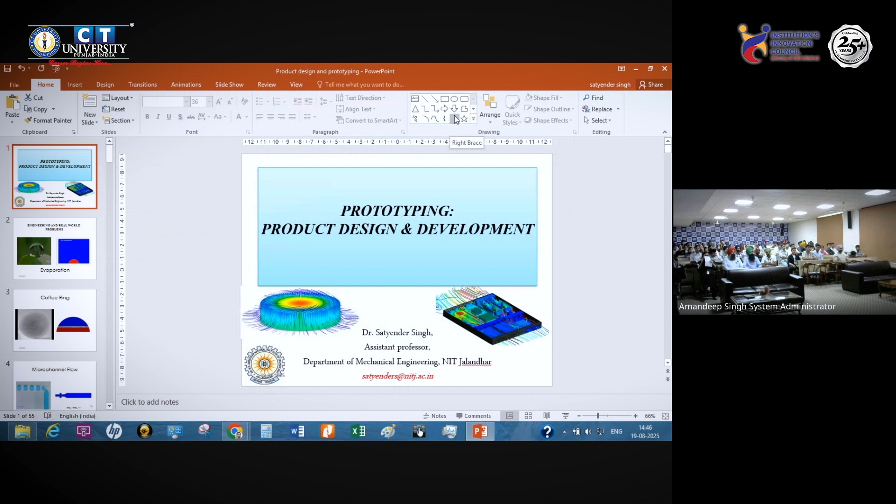Okay, my name is Dr. Satyender. I'm working as an assistant professor in the Department of Mechanical Engineering, and besides this, I'm also Associate Dean, Research and Consultancy. So we are also at NIT Jalandhar emphasizing this prototyping concept, which is a buzzword nowadays, as well as product design and development.

From the first year, we introduced some courses which are very relevant to this. The idea behind this is that we want to promote more student startups and faculty startups at our institute, and as per the idea of the government, we want to promote these activities now in academic institutes. So I will also discuss what steps we have taken, and this may help you set up similar things at your institute.

I hope my audience is, I think, the first year students. My presentation will follow like this: I will be discussing the capabilities of the software at present, or the tools we have based on mathematical things, and how closely we can relate experimental things with theoretical things, and without much expenditure on experimentation, how we can optimize the systems.

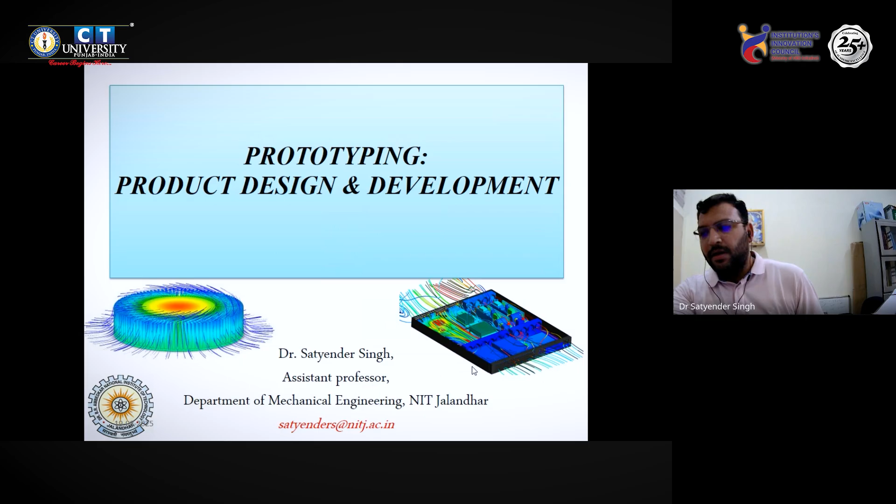So this is just an intro with this particular word, prototyping. So first, what I'm going to show you, my slides will go with some glimpses of the mathematical tools we have that reveal your engineering or real world problems. So real world problems can be like this problem of evaporation.

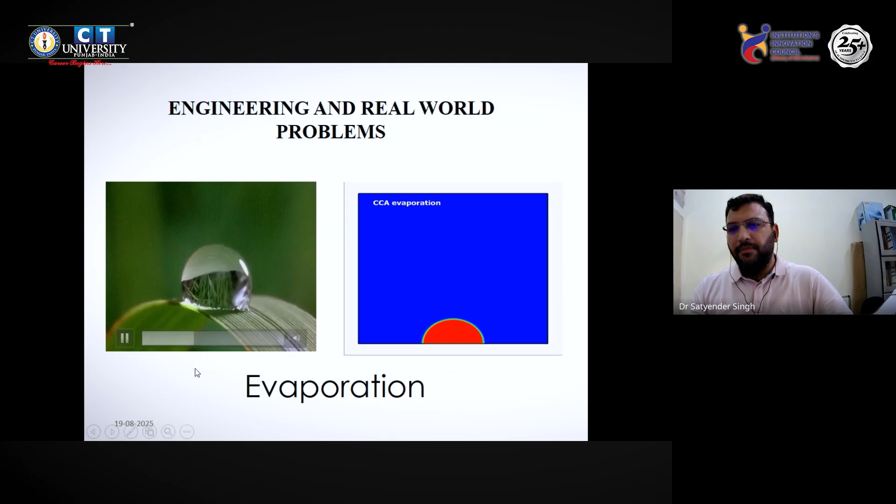See, you can consider a droplet resting on a leaf, and as evaporation takes place, slowly this droplet will escape. To capture this video, as all of you, the faculty members, are well aware, we need a high speed camera, and this physics later on can be implemented in some engineering problems.

But before jumping to the application viewpoint, we need to reveal the physics. So to reveal this physics in this particular experimental problem, we need a very costly high speed camera that may cost about 10 to 20 lakhs, and we have to capture every fraction of the second. So these high speed cameras offer facilities like 2000, 4000 frames per second. Only then can this very slow evaporation process be captured.

So I hope now you can relate this with the real way of capturing this droplet escaping as a problem. It may take a day, it may take 2 or 3 hours. Now, on the engineering softwares or mathematical tools, we have the same kind of mimicking. We can do that. It offers the same kind of facilities to mimic that.

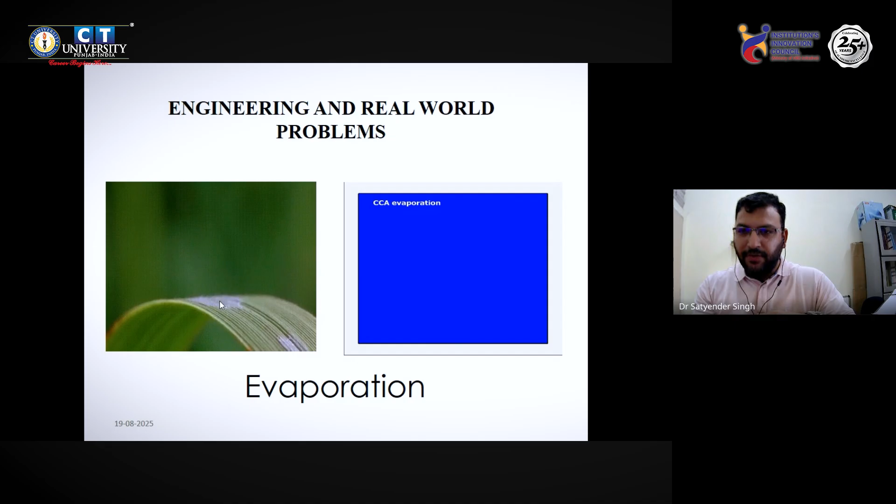Now the point is, what comes out of it. If I talk about the physics, particularly about this evaporation, there will be radiation that is responsible for raising the temperature of the leaf, and then the surrounding air that has less moisture, and then these droplets, the agitation will start on the bottom of the leaf surface. Molecules will start exciting, density changes will occur, then the molecule will escape. So these things will come, but these softwares will help you understand how these things are happening.

You can now write an engineering problem using these advanced mathematical tools, as well as reveal the physics. That will help you to write your problems later on.

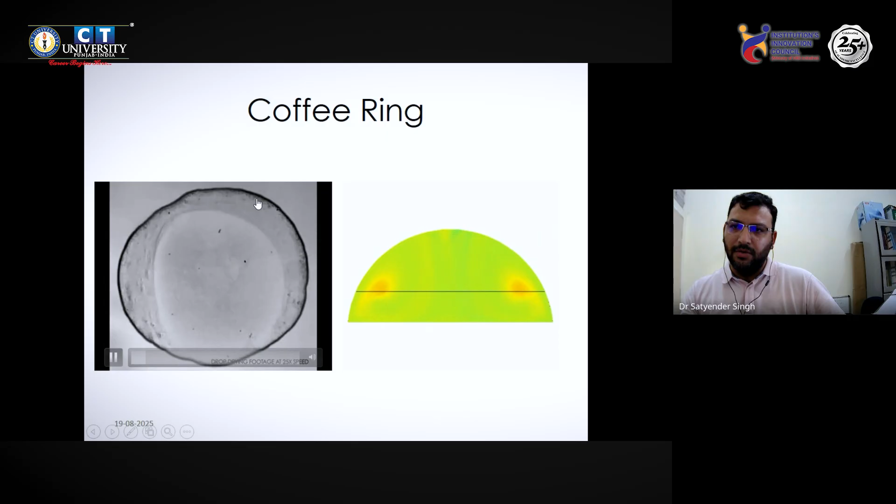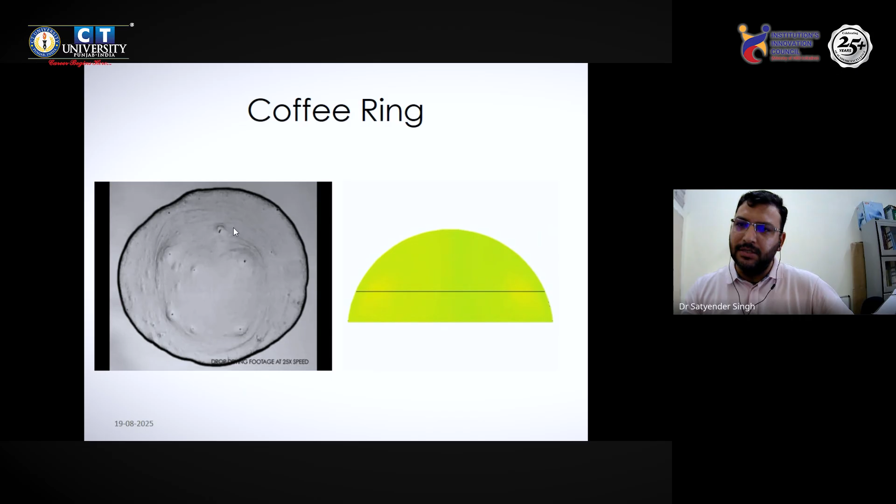So I am now relating this all with the coffee ring problem. If you spill some coffee, after some time we see these things happen. The responsible thing is the heat of the surface that excites the molecules, causing a density difference and raising them apart, which helps roll the individual molecules of the coffee, binding with some dust particles to make a layer, following the temperature gradient.

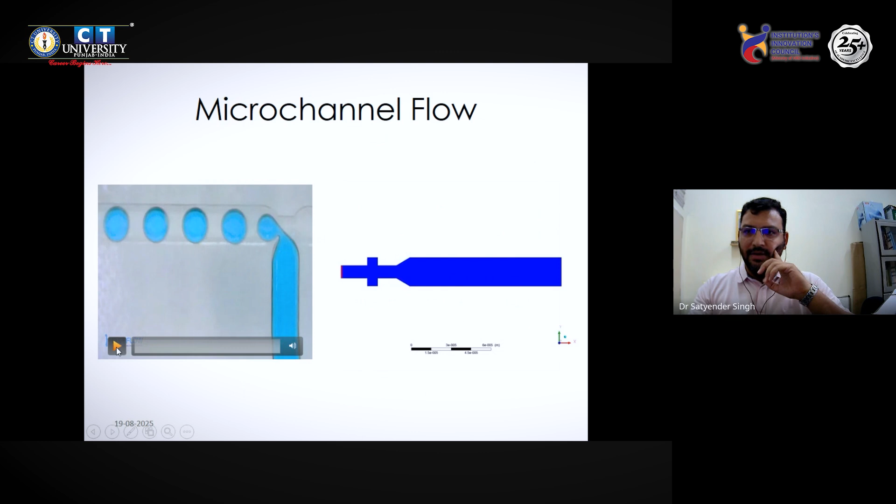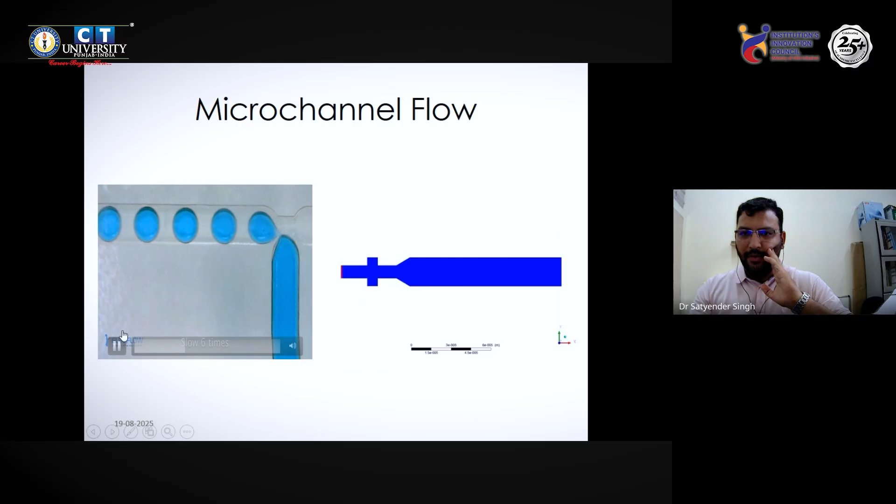By applying this physics and optimizing these microchannels, we are able to achieve this design and later develop it. But how can we do that without any expenditure? Through some CFD tools, through some software, which also facilitates creating the same kind of environment and getting the solution for the same.

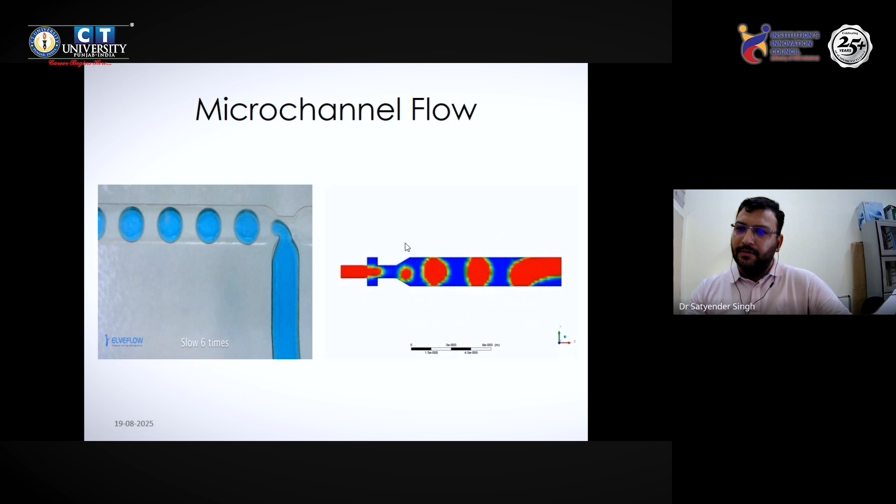So another example, say one droplet falling in a water pool, one of the standard multi-phase problems. We can mimic this also in software. Why am I showing you these videos? My point is to establish the software's capabilities to assist engineering in achieving prototyping, or product design and development.

This journey of an idea to a design actually first takes time and an overall understanding of the problem, and then it takes a whole journey of skills to make a product that can meet industry standards or meet the demand of society.

Earlier when we didn't have these softwares, and their capability was not up to that mark, we kept doing experiments, and from experiments, from failures, we had our learning, and then we later made a product.

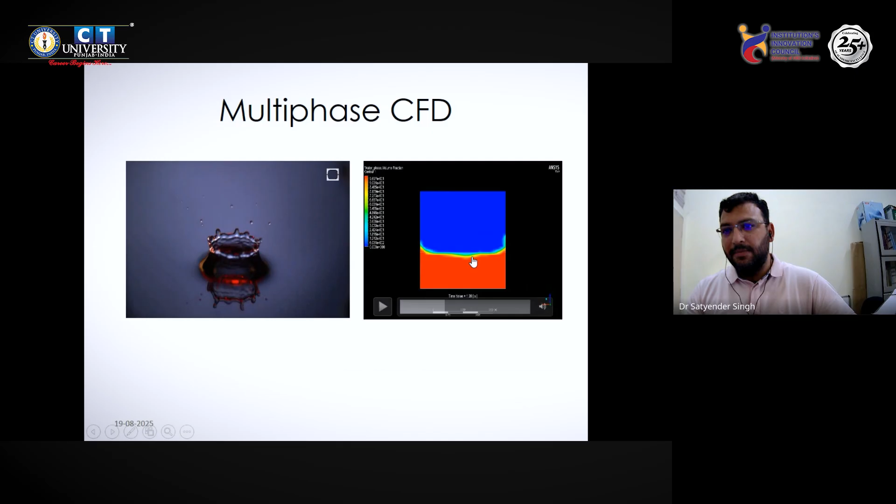But nowadays, these are the capabilities of software. Whatever is actually happening in real-life engineering problems, we are able to assist them, reveal the physics of that, and then we can optimize them.

If students are from the first year, optimization means, say, if you want to make a jet engine, or an aeroplane, or a fighter jet, whatever speed you want to achieve has to first be analyzed. Various shapes have to be given, so mathematical analysis has to be done, then only are you able to get some geometries or shape of that aeroplane or fighter jet, and only then will you manufacture it.

So what should be the dimensions - that is optimization, the value of your parameters that you have to set.

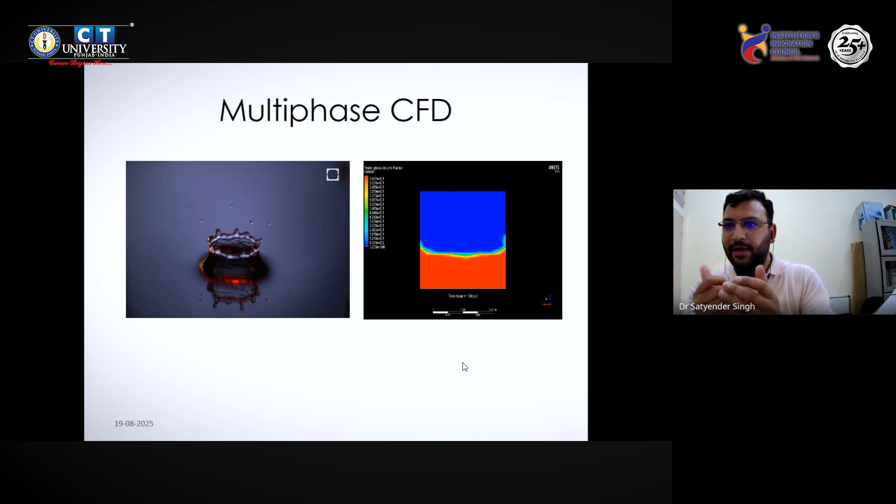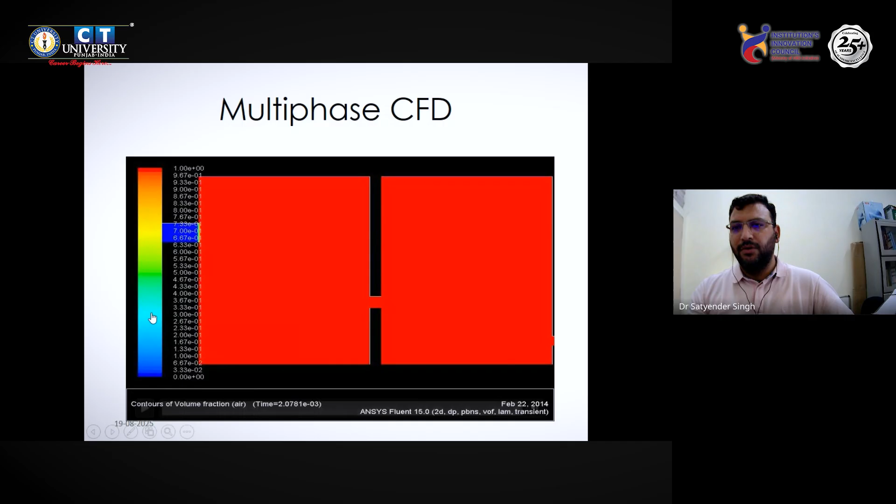Now another problem, say a dam filling problem. If you have to construct a dam, then how much time will it take to fill, when water will splash at a particular height, what will be the erosion rate, drag, and other things - we can investigate like that.

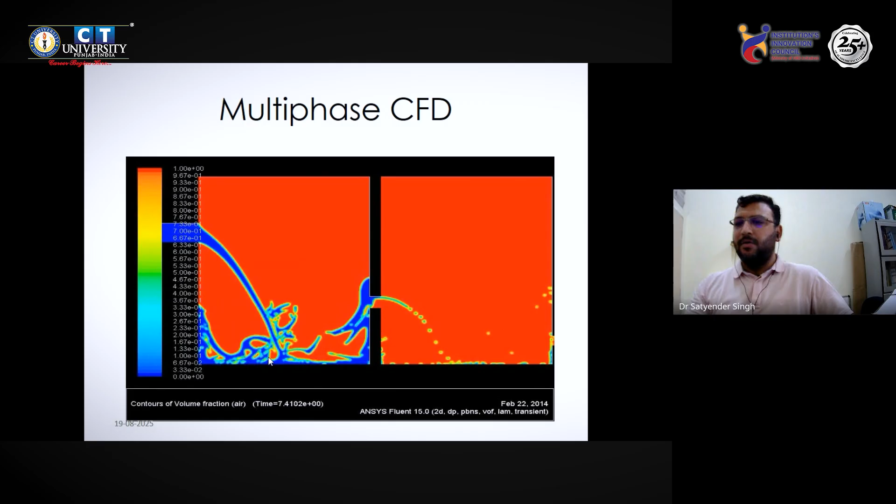Without doing any experiment, in a sophisticated mathematical environment, we can handle all these problems. If there is a dam structure, how much penetration can occur below the dam in the soil region - this problem also can be solved. So these things are very important from the structural viewpoint.

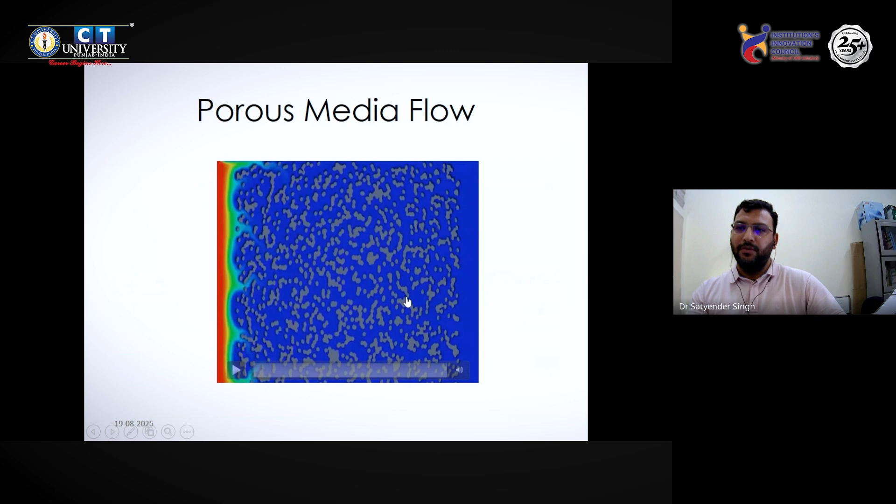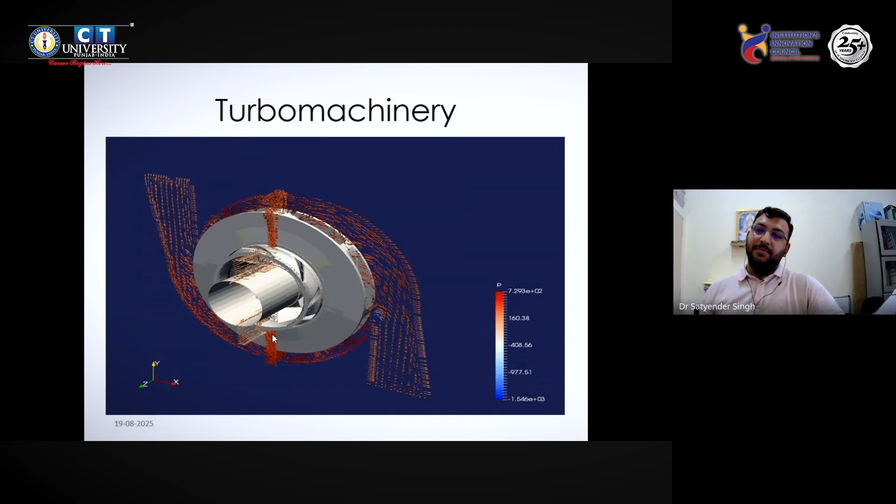For turbo machinery, what should be the fan angle so that we can get maximum flow rate? A CAD drawing followed by some numerical approach of mathematical numerical methods, and we are able to simulate them to a particular objective. All these were prototypes earlier, then came to a particular design, and later on to a product.

So you will all be fascinated, if you are a mechanical engineer, toward cars and automobiles. I'm just showing you one video to grasp how we aerodynamically balance these vehicles.

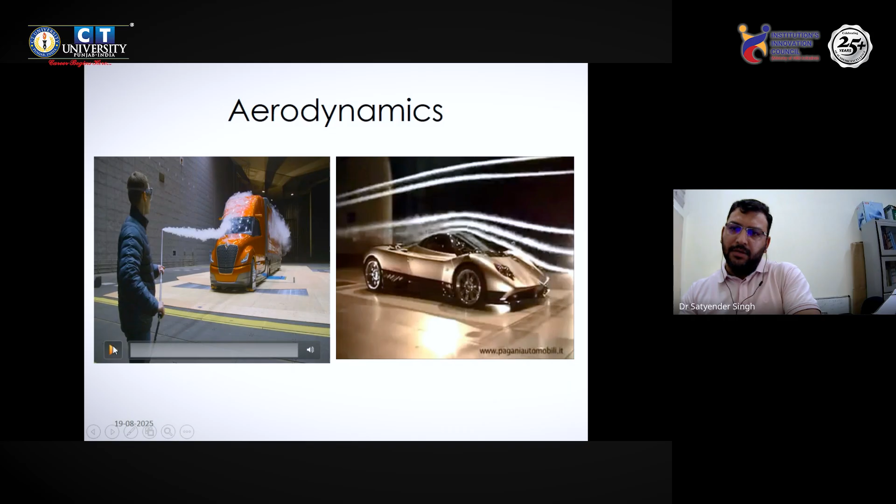So we have a particular wind tunnel, a big room where we have facilities to artificially create airflows with the help of blowers or fans, relative to the vehicle speed that can be attained at a particular speed. So we force the flow against the stationary vehicle, because it's the same scenario whether the vehicle is moving at high speed or the flow is moving over the vehicle, because relative velocity will be there. So in wind tunnels, vehicles will be stationary and the smoke will be flowing over the vehicles. This is how simulations are carried out.

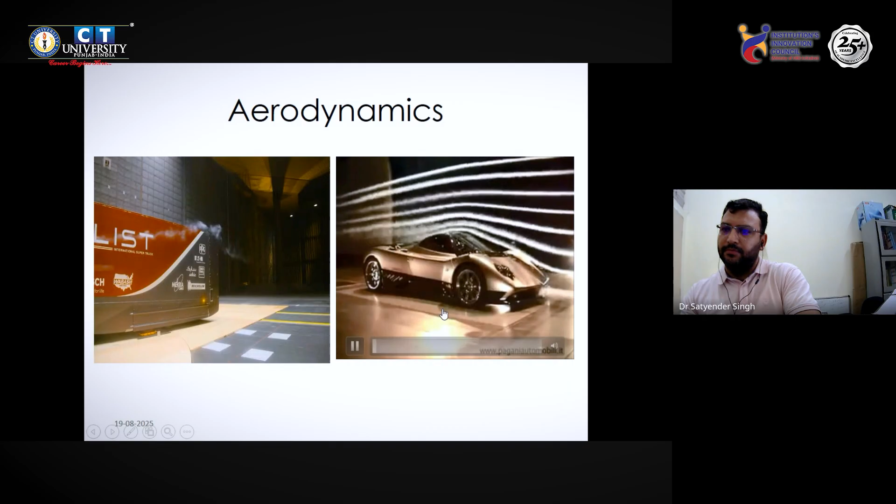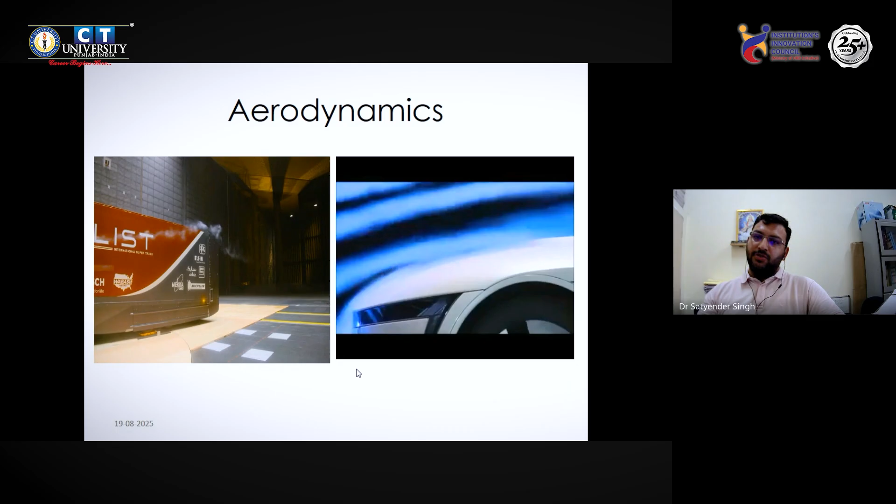So why are these studies important? So that your vehicle can be aerodynamically balanced at a particular high speed, at a particular turn, to avoid accidents, because the air will cause drag on the vehicle. It also reduces the power of the vehicle. So this is just to study that.

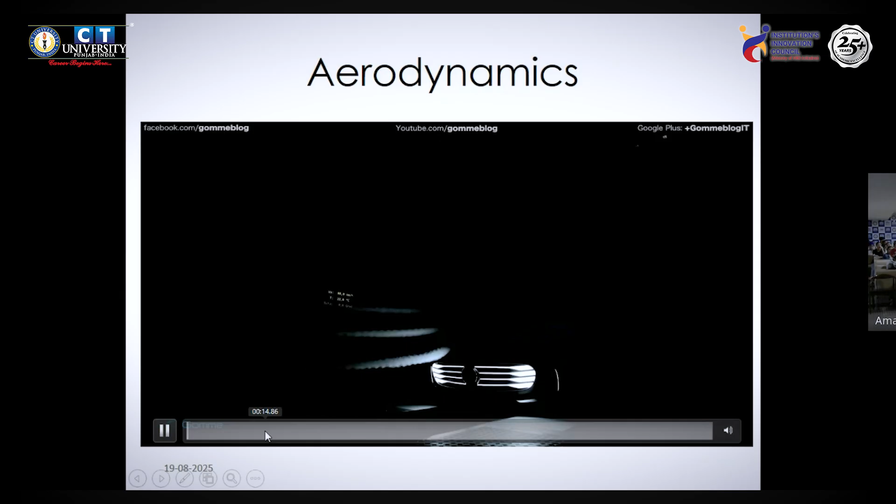This is about Mercedes. They also have some kind of facilities at their end. Dr. Singh, hello, yes. Any student, if somebody wants to ask a question, please. The professor is here. If anybody wants to ask any kind of question in between the slides, please tell.

It's a very interesting session. Any session is interesting when there is a two-way channel, meaning if only sir keeps speaking and you keep listening, you get bored. If you are observing and you have some question in your mind, please kindly ask.

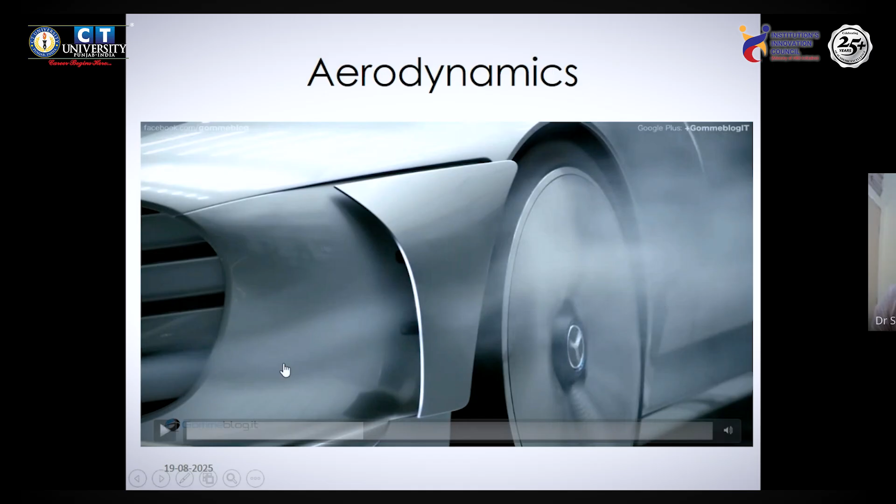So I'm showing you another video where the aerodynamics of a vehicle is checked by Mercedes.

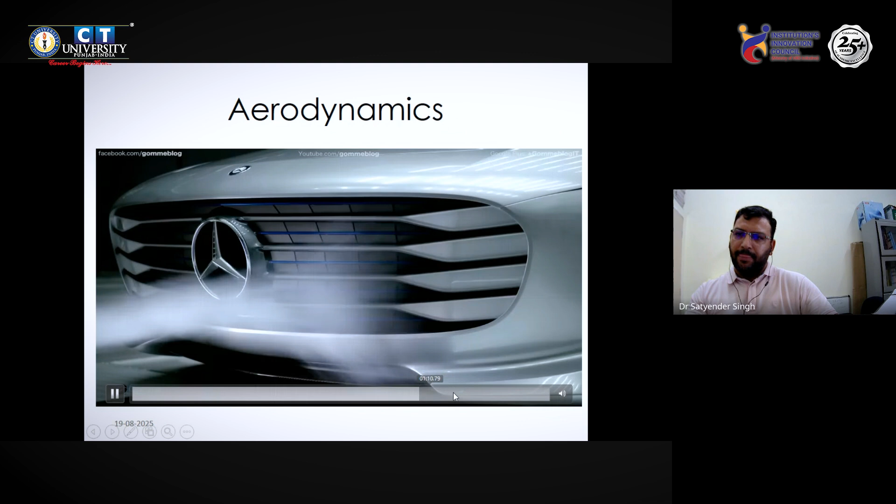The idea is to understand the aerodynamics of the vehicle so that the drag, if there is any, can be addressed, because in the automobile sector there is huge competition in the market. There are so many models, and if a particular company has to sustain in the market, they have to continuously change their design. Every change in design also affects the technical satisfaction of the physics responsible there, meaning for every vehicle design there will be changes in the aerodynamics. So I'm showing you some actual pictures and the simulations we did.

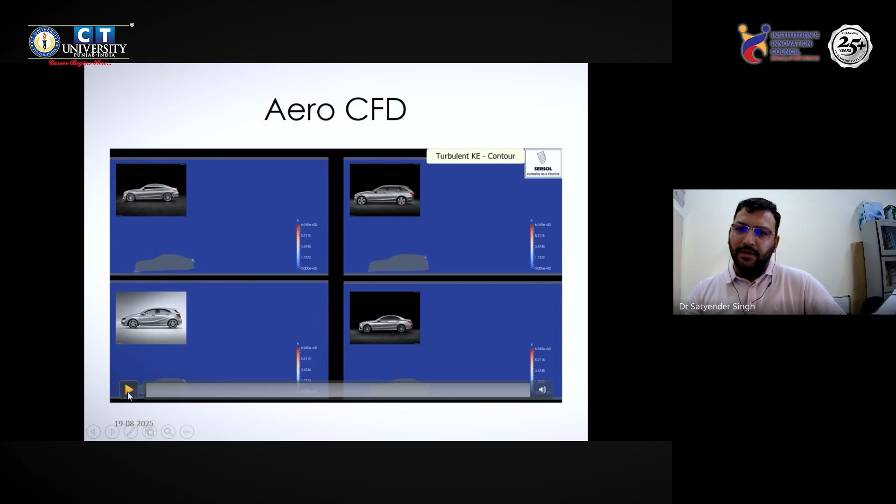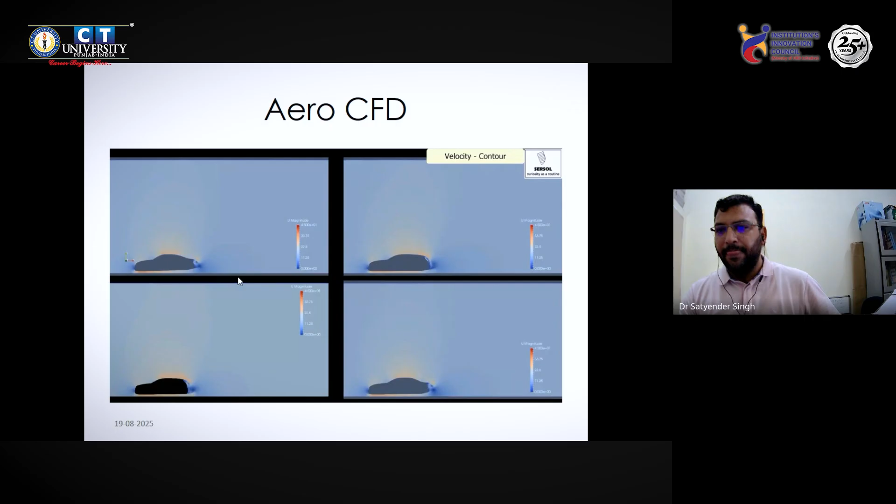Without doing any experiment, because wind tunnels are not easy to construct everywhere and require huge investment, we can avoid that using dedicated mechanical engineering softwares. Without any wind tunnel like these companies have, we can simulate all this in a computational environment under similar conditions.

Again, my message is that if you want to start your journey from a student to a startup engineer, or achieve some engineering expertise during your studies, you must know what softwares are available in the market, and up to what extent you can have a proper design without spending money on experiments, and then develop and manufacture that.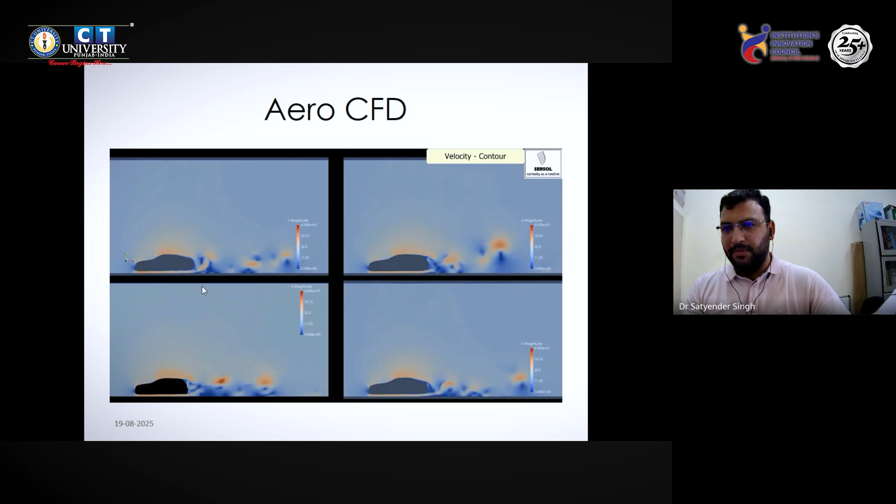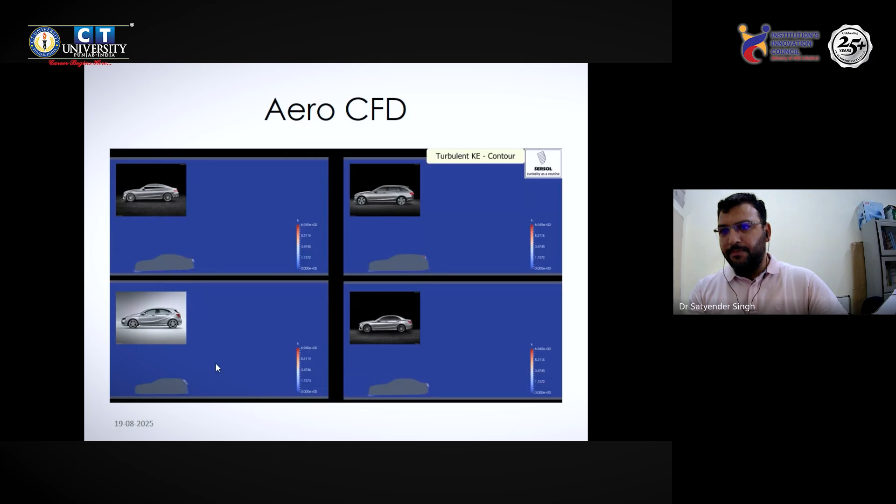So from this particular video, using software we created their CAD drawings. I hope everyone is aware of CAD drawings - it's the actual replica of a physical domain in a computational domain. By specifying the coordinates, we create the same design that exists in the form of a sketch or physically.

So now, say, the maximum speed of a car is provided in a controlled environment, and you can see, and we should be well aware of, this particular drag, and how the air is gliding over these structures.

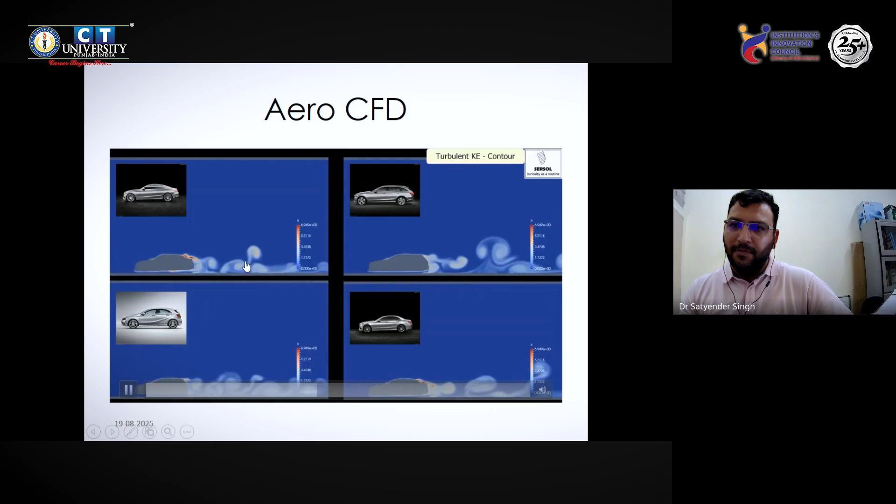So these softwares give you a deeper understanding of the physics followed by the air, that cannot be easily understood even in a wind tunnel. This is just a showcase of the softwares and mathematical tools that help you design and optimize your structures. I already discussed this earlier.

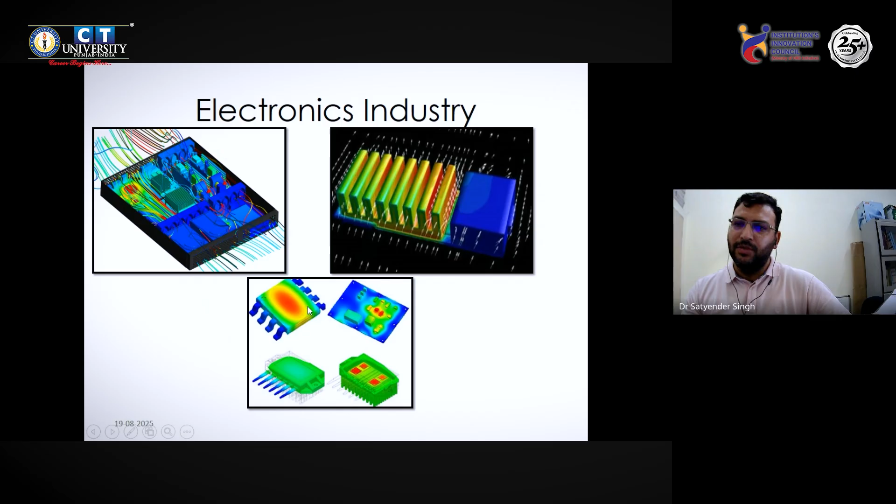These are the zoomed images of heat sinks that are used for transformers or electronic devices to maintain their low temperature. These are the microchips, integrated circuits, and their cooling heat sink designs. These colorful images show you the temperature maintained and how the heat transfer is taking place around these electronic circuits.

So we all know about submarines also. Submarines have to face a huge drag because of the water, which is highly viscous compared to air. So that will be a big challenge when they have to speed up in the ocean, or for every underwater vehicle.

So these also can be simulated. Even if you want to change the existing design of a submarine, we can take the same kind of design or new designs to the software environment, and there we can simulate them by applying the same kind of conditions they have to face later on, and optimize our geometry. We can make various changes in the geometry so that a goal can be achieved.

I'm just showing you one animation that we have obtained. So now submarines are also like fish kind of structures. These are called fish-like locomotives, inspired from various fish structures, so that they cannot be easily captured under radar conditions.

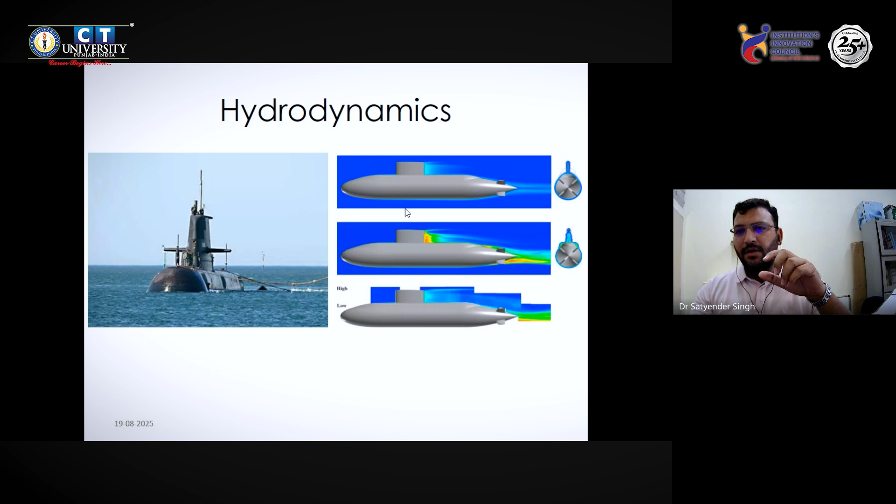So some confusion can be created in the submarine designs. These are the various submarine designs at present. Let's say this can be the idea of a particular scientist, to create this illusion, why not change submarine design from a conventional one to a fish kind of structure. So this is the idea.

I think this particular thing can help you understand prototyping as well. So what should be his journey? He comes up with a particular kind of fish structure that in the real world has very less drag. We all know that the shark's fin structure is super hydrophobic in nature, which means water repellent, and it creates very less drag.

Now this is a real problem we have now: how to create a submarine out of it. So there will be many challenges. Number one is what should be the design, or what more design changes are required, whether the feasibility in the real structure is there or not. I mean from the manufacturing viewpoint, from the production viewpoint, whether the same standards can be achieved or not.

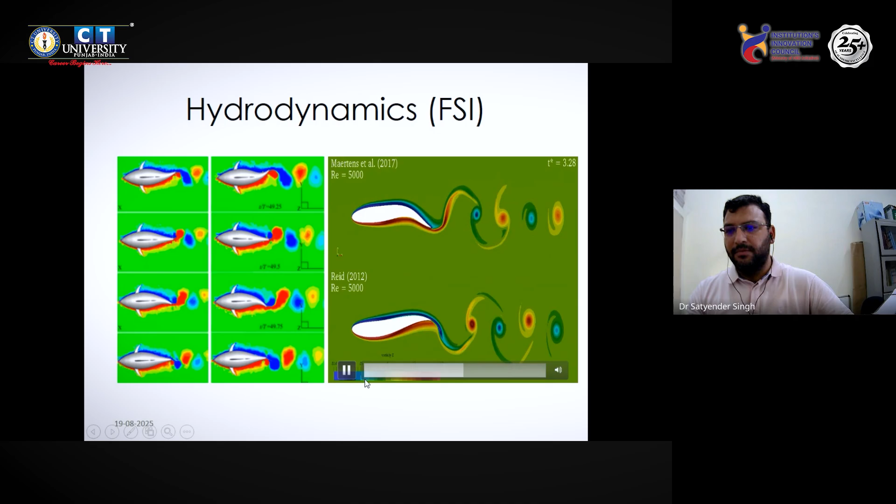So these things can be earlier understood in some mathematical platforms. The same kind of structures can be formed there, and various structures can be analyzed toward this particular objective. Then finally, once we have the particular dimensions that satisfy the physics, we go for the manufacturing. So these are the steps in product design and development.

My earlier slides are just glimpses to brief you about the software capabilities we have, using softwares without spending a single rupee on your experiments. You can create your designs, then create your design standards. You can have some dimensional values relevant to your product outcome, and then go for the development side, the manufacturing of your product. As a student, from the very first year you should start your journey, and how that journey will start will come in my upcoming slides.

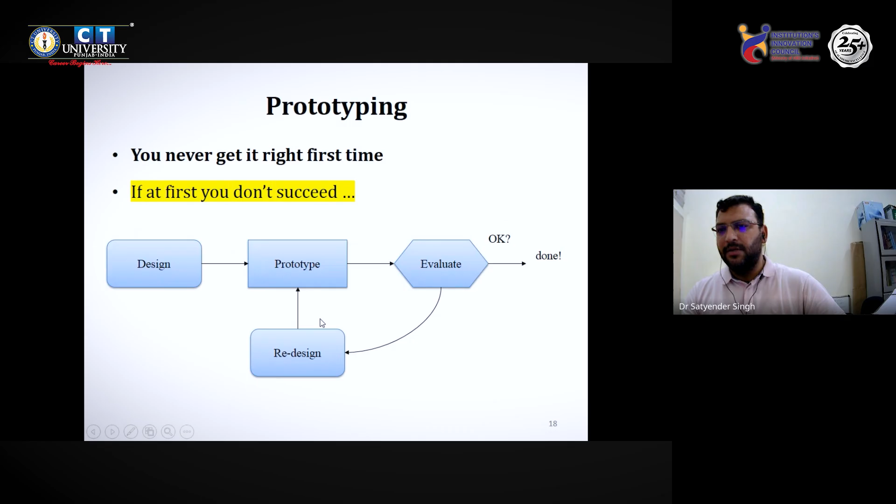So prototyping overall: as I already told you, there will be design, and then some mathematical standards and tools you will follow. Although you will do some experiments on your design, check your capability, and then evaluate it. If it is satisfied, then it is okay; if some changes are required, you have to change your design again and again. This exercise keeps going until your final goal has been achieved in terms of some geometrical dimensions. So overall, this flow diagram will help you understand the steps in prototyping.

So first you have to recognize the need, and then a problem formulation will be there. It will help you to identify the problem, and then gather some information. This problem may be a social problem, or it can be some inspiration, and then that has to be dimensionalized.

That dimensionalization will be called the problem definition, meaning a drawing has to be created. For example, if you want to design a computer mouse, you have to give some dimension to that. Then information has to be gathered - if you want manufacturing, what should be the suitable material and other related aspects. Or if you want simulation, what software to use, what conditions should be there.

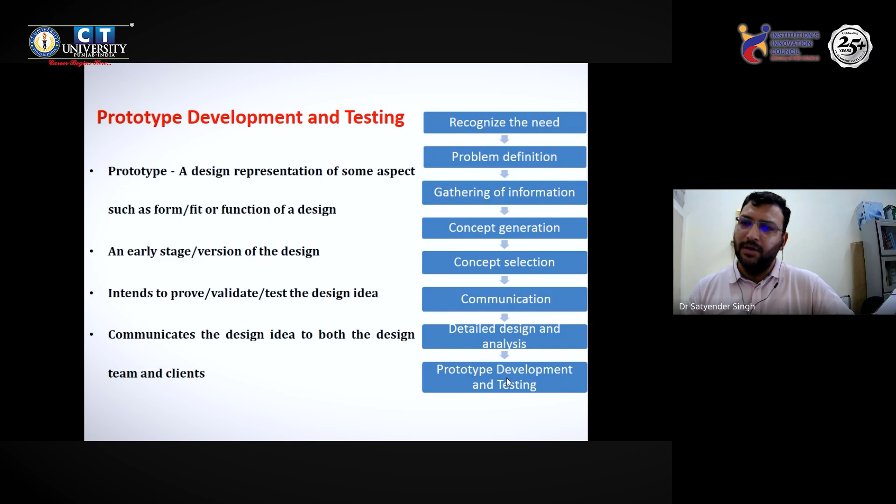Or, since this cannot be generalized, sometimes before launching any product to the market, we create a prototype of it - meaning a similar kind of product we create and analyze, test for its durability, and later, if you test it properly, then we launch our commercial product.

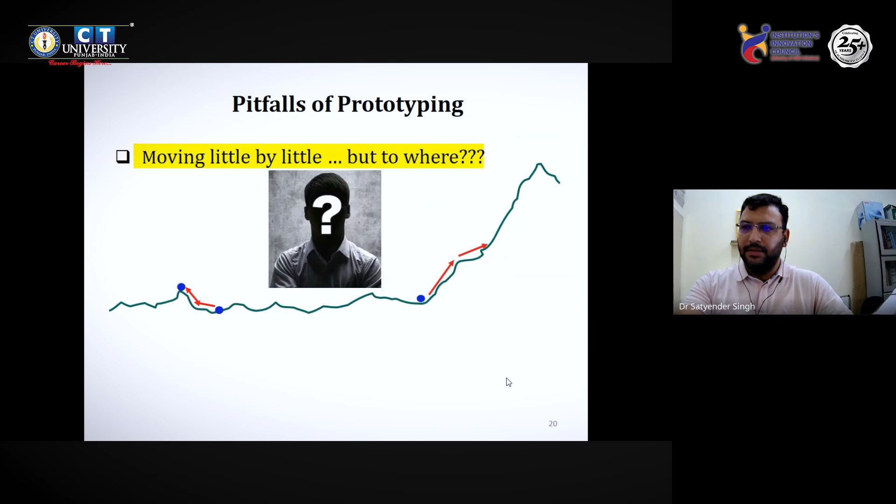So I want to emphasize problem formulation. As I told you, as an engineer, you may aspire to have your own startups later, or want to achieve something through your minor or major projects during your BTech. So what should be the problem? Obviously, as an engineer, our goal is to assist society, to add human ease through any product or process.

So your idea can be a society-driven problem. Sometimes take a look around you and see there are challenges to human beings, and you want to add ease by launching some product. As an engineer, you see this is a problem to society, so why not launch a product for this. Or it can be your personal experience, like in your day-to-day life, hostel life, or college life, you may face challenges keeping something or having something in your room. For that also you can launch a product, so your problem formulation can spread to that too.

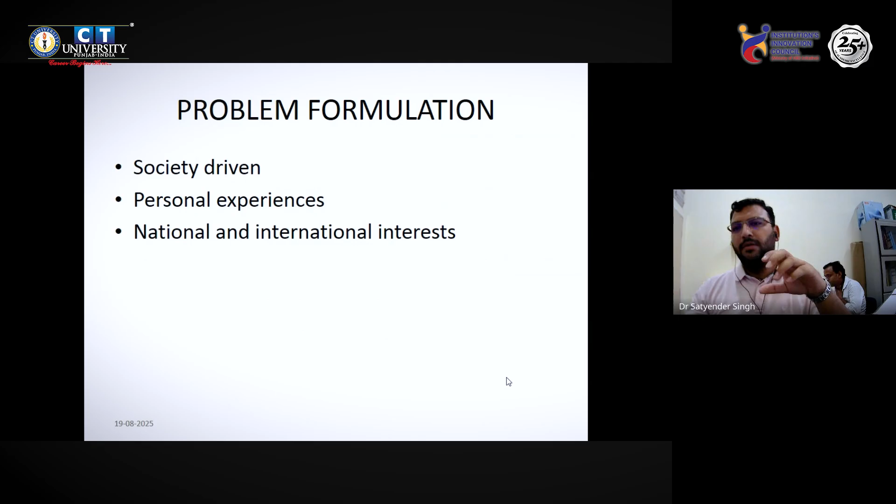Or sometimes your society or personal experience - let's say you belong to a very hilly region, like the Leh Ladakh region. Everyone knows snowfall is there, and winter lasts 5 to 6 months. So that becomes a societal problem. Now as an engineer, you want to launch a product to add human ease. In winter, what will be the requirement? Space heating will be the big challenge there. So as a product, electrical heaters can be optimized, or solar heaters can be provided there. So they can be the product for such problems.

Another example for societal driven problems can be, let's say you belong to Punjab. Punjab is an agriculture state, and you may be seeing some farmers facing problems in their day-to-day life related to agriculture exercises. So you can add some applications there that can add ease for their working. These problems are actually the society driven problems.

And personal experiences, as I told you, let's say you are traveling in the train and you may be wondering - you have often observed in the train that there is a table only for the guys sitting just next to the window. But what about the other persons? Why are they not getting a table when they have their meal, even though they are paying the same amount? So this can be a personal experience. You can make a design so that it can be folded up to a small sized table, but can be extended for all.

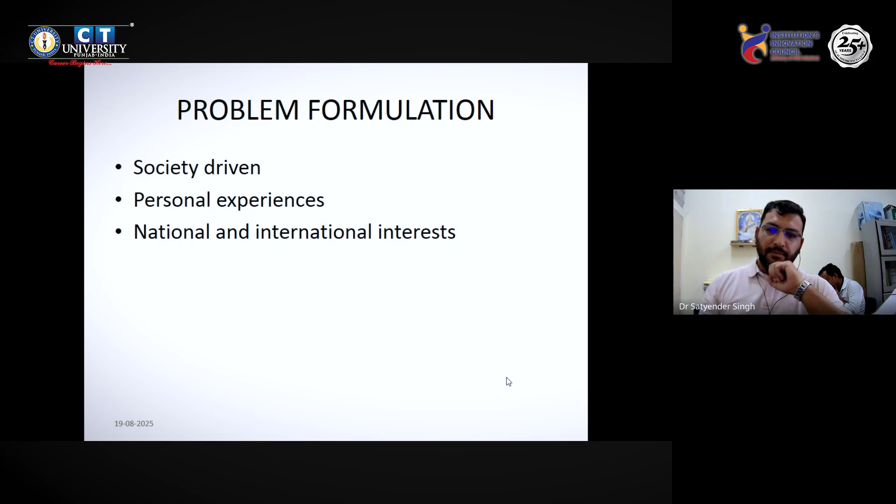Day to day experiences can also become inspiration and be taken as a problem. And then it can be a national or international interest as well. Let's say you may visit ISRO or DRDO. After this particular war between India and Pakistan, DRDO has launched a number of problems on their website related to drones and other warfare equipment. That is national interest, and as an engineer you can contribute there. International scenario can be, let's say, global warming is there - why not have an overall solution to industrial waste, or other ways to lower global warming. So there are international interests as well, or if there's an international market for a particular product, why not participate there from India.

So these three points cover how you can decide your problem particularly, because your prototyping will first start from your design, and that design must be a true motivation to you, so that you can follow your interest on a longer journey, and then finally get that into the form of a product.

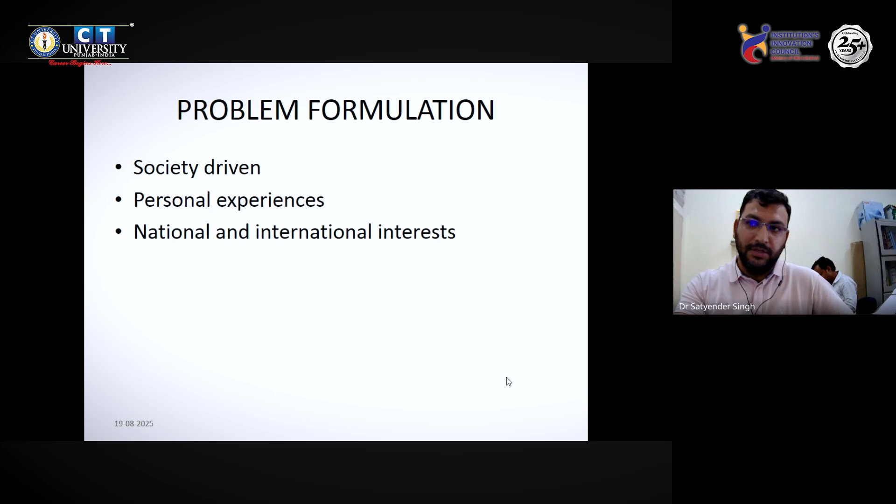So in the same way, we also inspire our students at NITJ from the very first year, so that they must start with some ideas and keep working up to the final year on these ideas. I am taking another example from where our journey started at NITJ, particularly my research group.

We took up some problems of space heating particularly. We see that the Indian Army is deployed in Siachen, and about 10 lakh of the army or forces are deployed on the Indian-China border, and they have to sustain a huge winter there. So many startups are contributing products to add ease to their day-to-day life there.

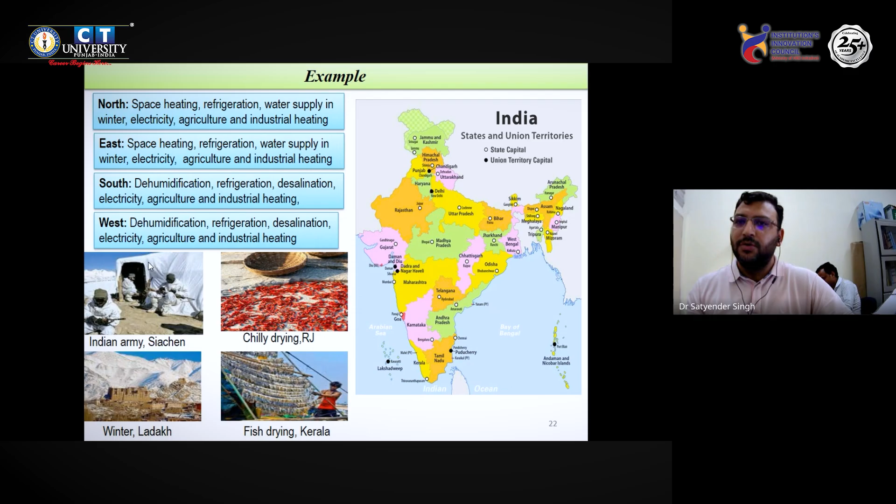Similarly, we looked across the country - Rajasthan is one of the largest chili producers. So if there's a product that can produce hot air from solar energy, which is available in good amount across the country, particularly in Rajasthan and Gujarat, we could achieve many applications like fish drying in coastal regions and chili drying in Rajasthan in a controlled environment that maintains the quality of the chili. Similarly for fish drying, and for the residents and army and forces who have to live in cold regions around the Himalaya. So we came up with the idea of a product called a solar air heater.

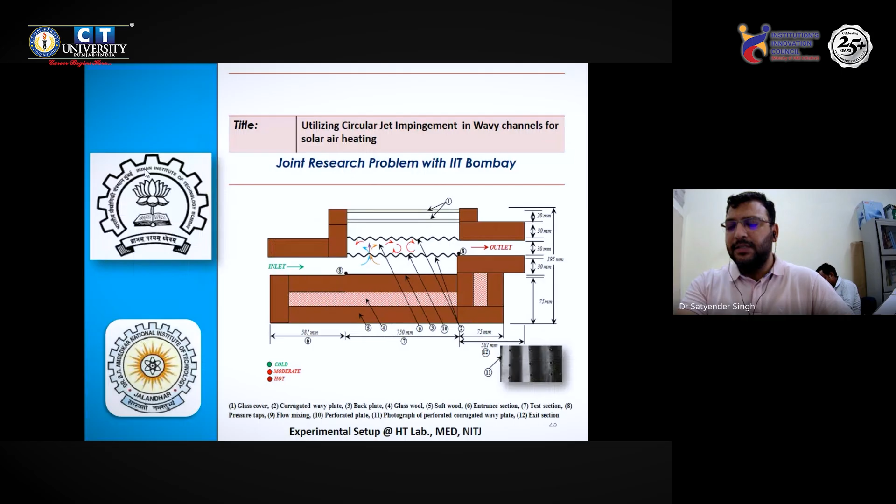For this prototyping, the designs we created were inspired by this particular application requirement of hot air for various uses, as I told you. Then we came up with designs from our fundamentals. The challenge was to actually test these designs under the physical conditions imposed when the product has to work. So we created an artificial facility at NIT Jalandhar in the lab, where a cold environment is created and solar flux is provided, and these designs are tested first under mathematical forms by developing our own codes. I'm just showing you some glimpses of that.

This whole exercise is done by some BTech students, some PhD students, and some MTech students as well. So before going step by step, let's discuss about it.

Our motivation was clear: to produce hot air from solar energy and to assist applications like space heating in the Leh Ladakh regions. The product can also achieve applications of fish drying and other agriculture drying applications, and can also be added to the greenhouse. So this motivation was clear.

Then what was our next step? Now design must be there. That came from fundamentals of heat transfer and fluid dynamics, and then we have to apply artificial conditions to these devices to see whether they will work or not.

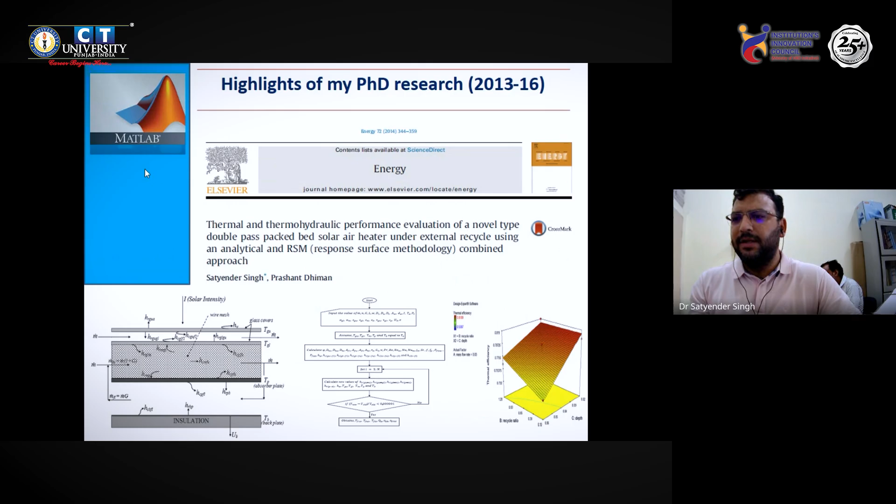So we achieve this mathematically using some codes and some software. Then we develop our prototypes. Once it is established mathematically that these systems can work, then we start fabricating them.

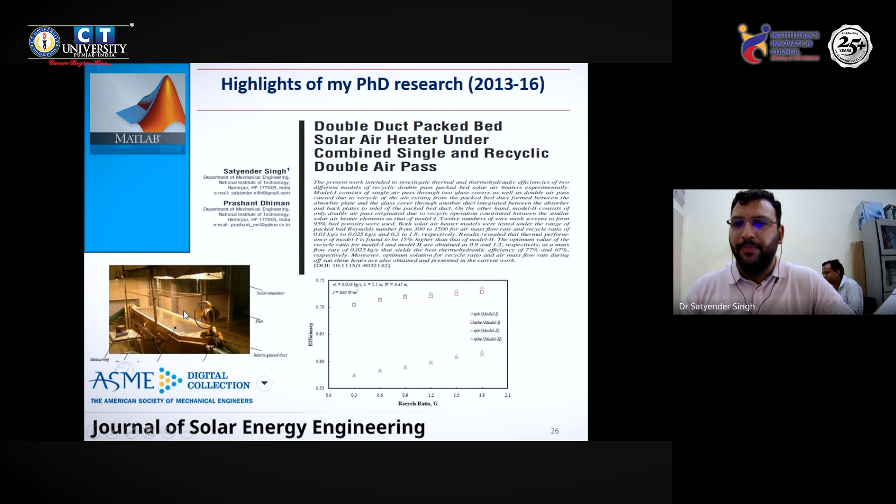Because all these devices have to work outside under outdoor conditions, we had to determine what materials to use for their casing, how to actually weld them, because there are various components of these devices. So how to attach them, how to maintain proper gaps. We start building and fabricating them with some raw materials, and testing them to some standards, because these systems must be insulated from some of the sides.

Let me briefly tell you about this system. Solar energy falls on a particular absorber, which is underneath a transparent glass cover. This glass cover helps the collector to not come into direct contact with the surrounding air. We force the surrounding cold air through the system, and it gets convected with the collector, coming out as hot air. Here you can see air is provided in, and hot air is coming out.

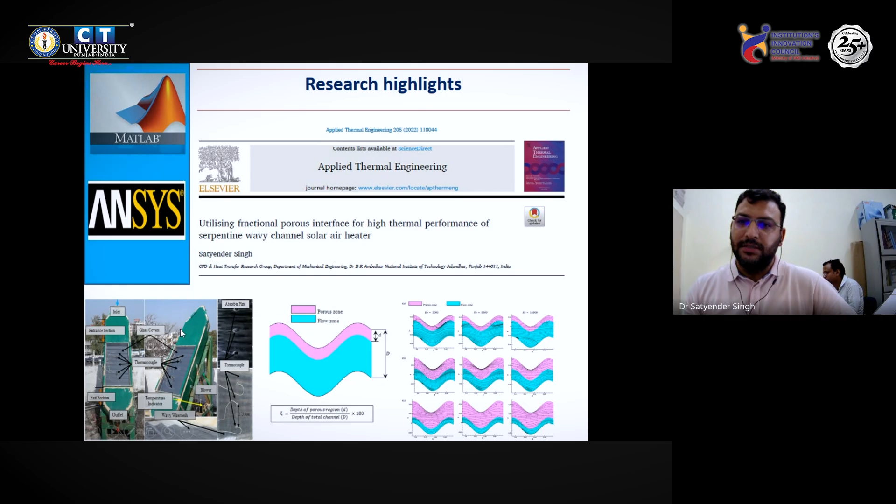So this system has to be properly designed as per the physics involved. What should be the material for the casing, for the individual components, and how they can sustain under weather conditions, including snowfall conditions. That will be the challenges for us to establish this particular commercial product later on.

So likewise we keep on developing that. And there's another challenge with solar energy, which is that it's only available in the daytime. So let's say sometimes clouds are there, and solar radiation is only available for some time.

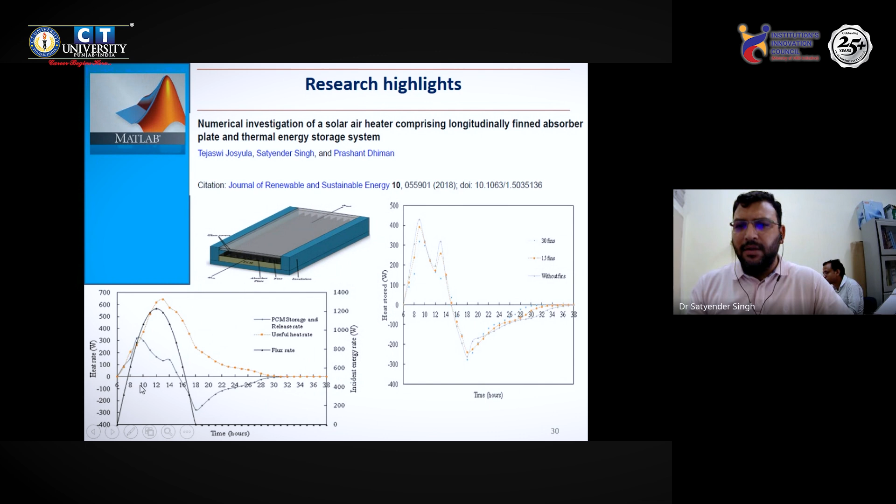So there we came up with another design of a solar thermal energy storage system, attached to the solar air heater as well, so that it takes the heat in the daytime and releases it at nighttime. You can see that it can provide hot air for up to 24 hours.

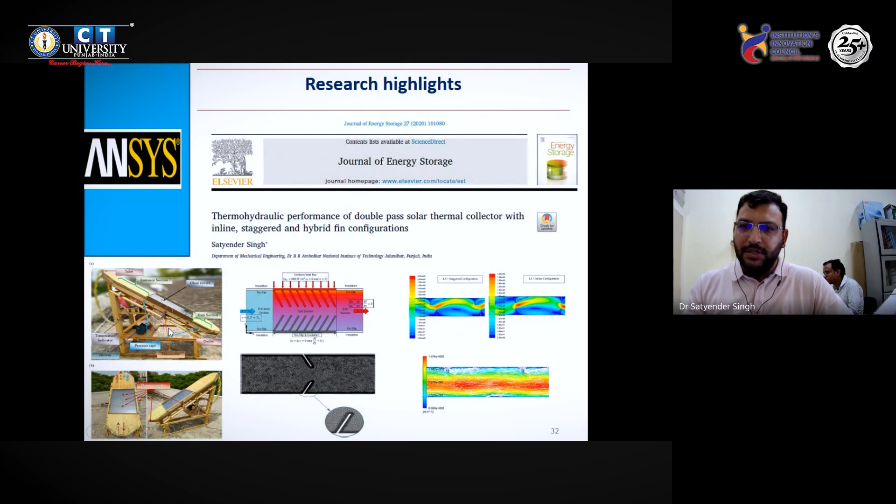So this way we keep on fabricating and testing our designs and prototypes. All these are prototypes, and now I'm just showing you them.

This is the final product that we developed, which is now up to commercial standard. But before finally launching this to the market, we also tested it using our mathematical software, which helped us understand the physics of it.

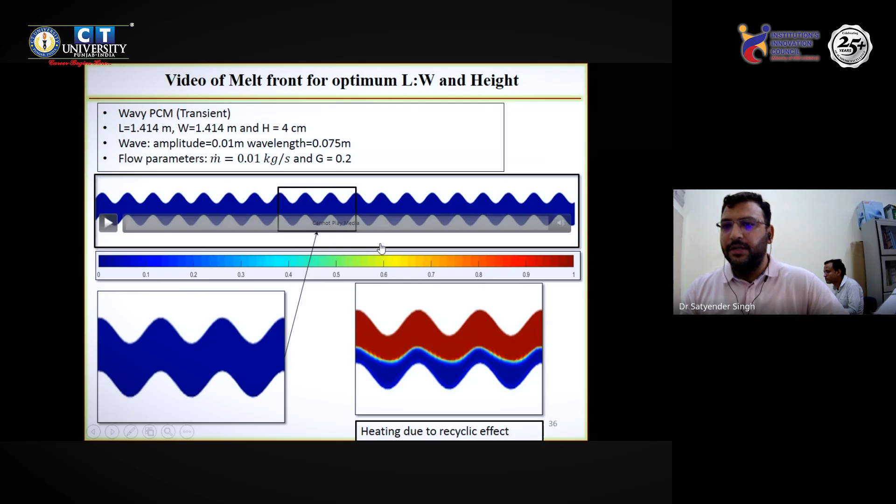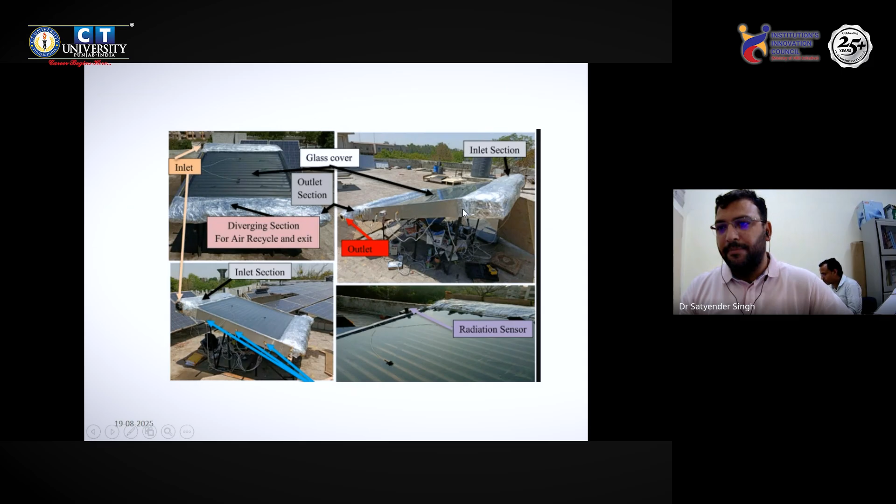Once we had a geometrical dimension that suited the overall design and other technical aspects, we conducted a survey as part of the prototyping, gathering information on what material suits well. Then we fabricated this commercial product, as you can see, and tested it for 1 year for its working.

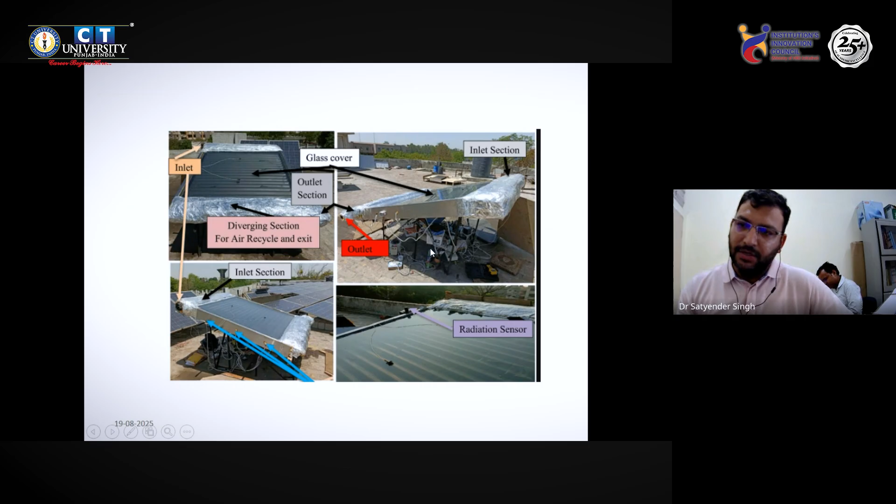And then we commercialized this with the hotel industry of these regions and with the Indian Army as well, for national interest. So another case study I will take.

We have taken one problem from ISRO also. This is an example of national interest particularly. Everyone is well aware of this particular agency, which keeps contributing to the satellite domain, to the various spaceships we are launching to various planets for their surveys. We are very proud, as a nation, that ISRO is contributing to this domain, and we are one of the top countries across the world because of ISRO.

Each component that has to work or deliver in space has to be tested before being attached into the whole system. For this, ISRO has also created an artificial facility where they are testing every critical mechanical component in a vacuum condition under very high temperature and very cold temperature.

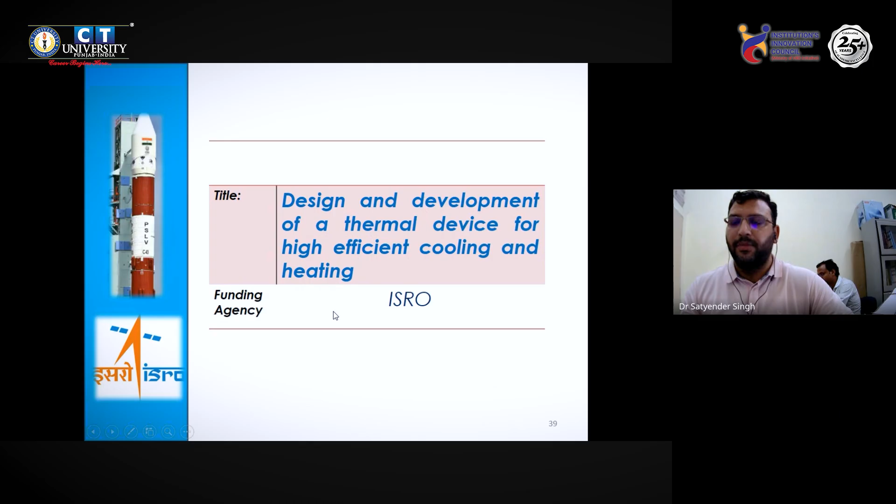So we took this as a problem: to design a thermal base plate inside the thermal vacuum chamber that improves its efficiency in terms of heat transfer. This is the final product we have to deliver. So what should be the steps for that?

First, design of a particular thermal plate and the vacuum chamber. Then we need the conditions for that - what are the actual conditions it has to experience later on in space, which have to be imposed. And what should be the geometry and other parameters to be manufactured later on.

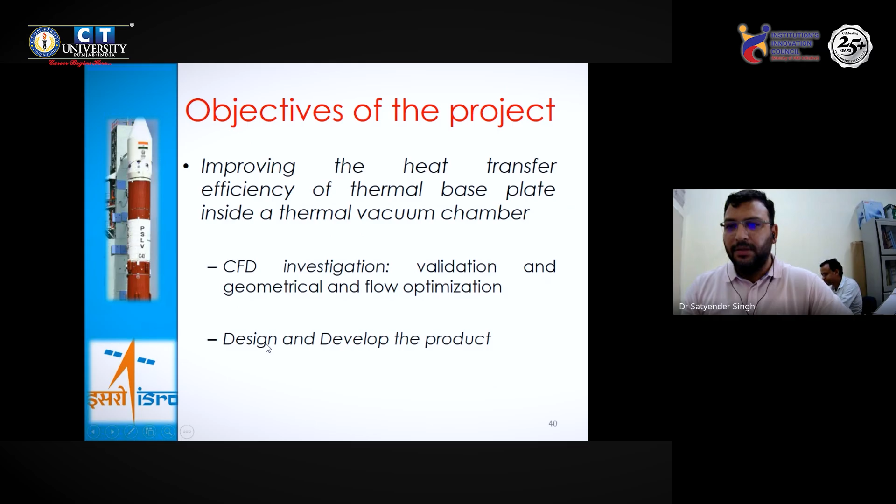So all of this we did in CFD, computational fluid dynamics. There are softwares that implement mechanical physics on such problems, giving us results like geometrical details - the size of the thermal plate and other measures we made to get a high efficient thermal base plate. Once we have these values, we create a prototype and launch our product.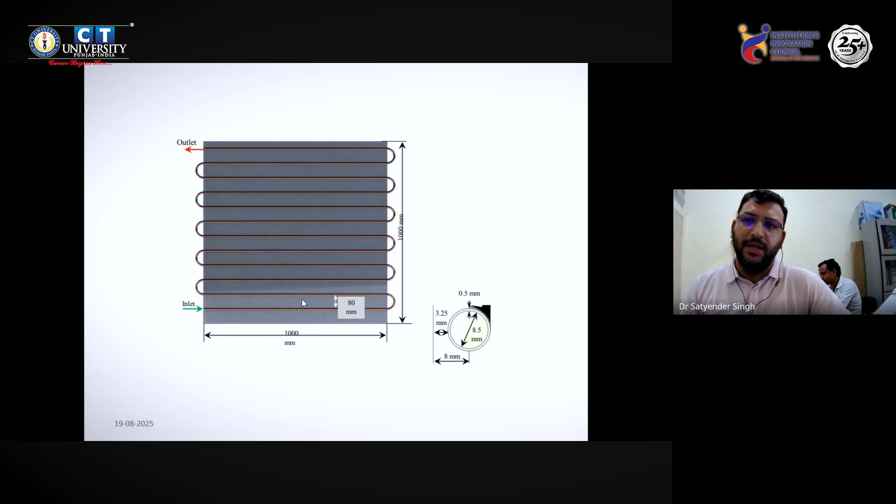So we came up with this particular design from our fundamentals: the treated fluid, hot or cold, will be forced through a jet plate, establishing direct contact of the fluid with the thermal base plate. In all earlier provisions, the treated fluid was not in thermal contact with the thermal base plate - it was flowing only through the tubes, and then from tubes to plate there was heat transfer. In this design, there is direct contact and high efficiency can be achieved.

But this was just a thought - from thought to a product.

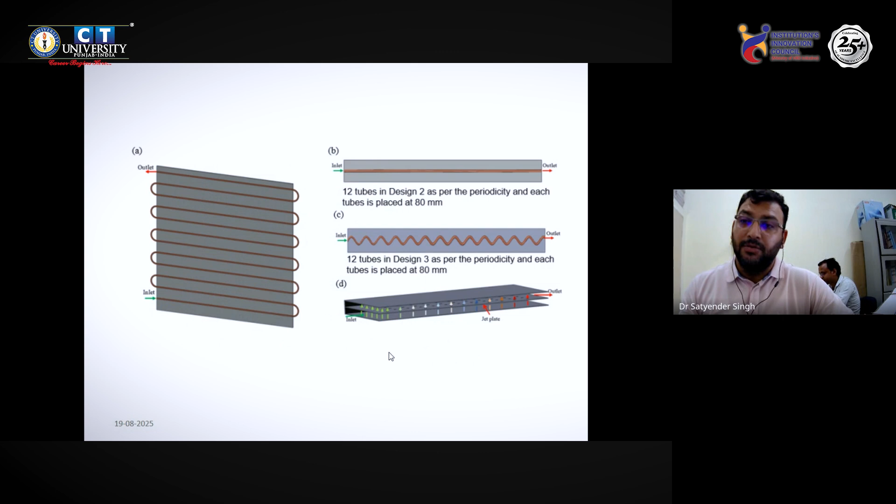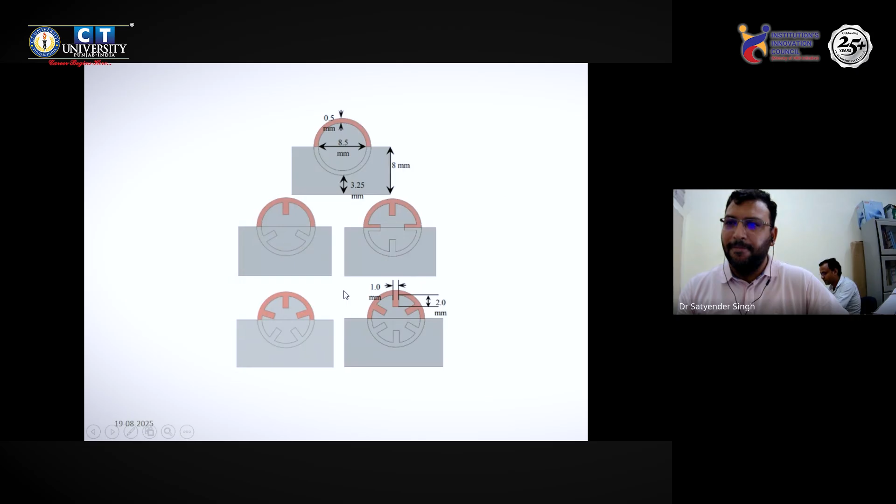So I'm sharing my journey with you to help you understand prototyping, and particularly the theme of today's lecture, from design to development. There were various fin designs that we implemented, and later on wavy tubes that we also implemented. Eventually we came up on this particular design, but this was a very hypothetical design.

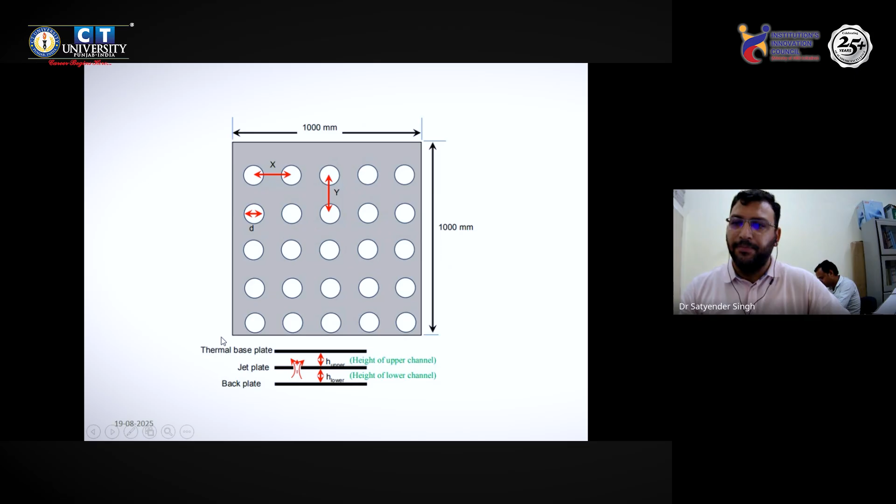We first created the drawing on a CAD software, and then from the CAD software we implemented it into a CFD software. We utilized ANSYS Fluent.

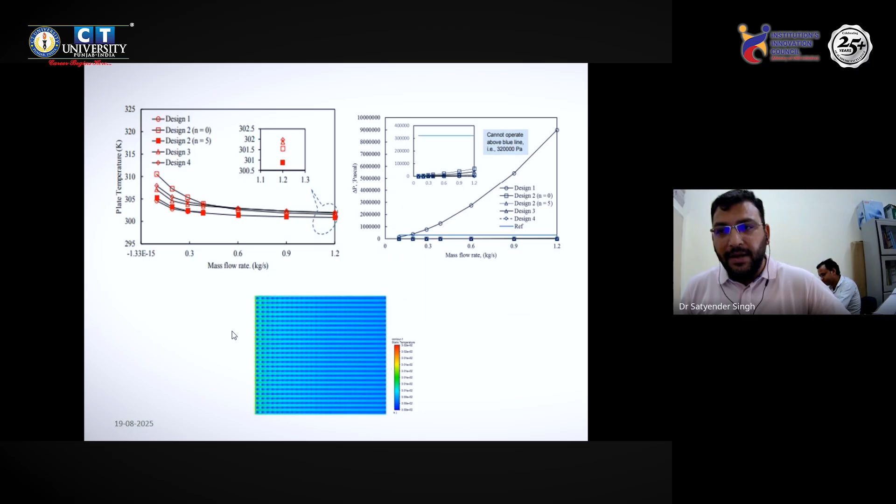All mechanical engineers, please remember there are some tools where students who are well trained are highly demanded in the market. You can directly search on LinkedIn and find many CFD jobs offered by various companies, where many skilled engineers are required. ANSYS Fluent is there, COMSOL is there, Star CCM is there. These softwares help you solve such problems.

So we are able to maintain a very low temperature during the cooling cycle of these systems. Compared to the earlier ISRO designs up to design 3, design 4 has a very low pressure drop, whereas other designs offer very high pressure. Because of this design, we were mathematically able to achieve the goal we had to achieve.

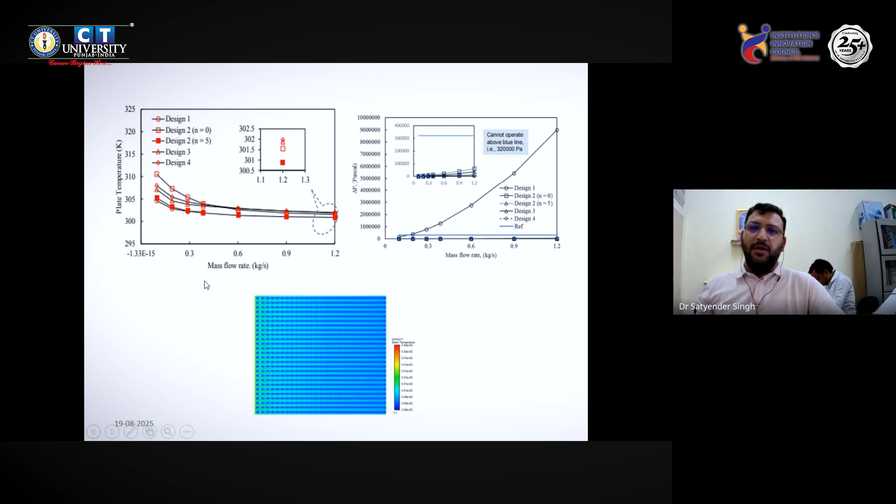Then it was time to implement. At ISRO, we started fabricating it with their advanced manufacturing facility. So this particular shape takes form from this design, which was just a sketch.

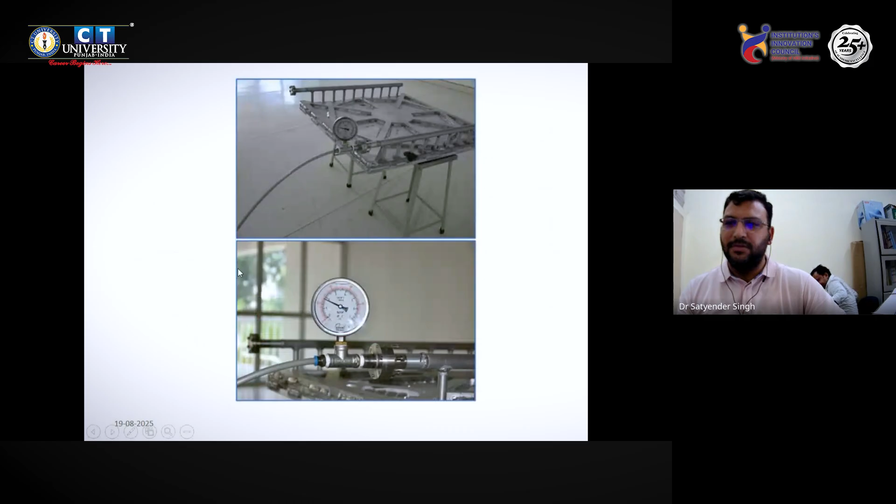This is installed inside, and we mounted various electrical packages that create heat under these conditions, which also provides plus or minus temperature control. You can see this facility here, and another picture of the same facility.

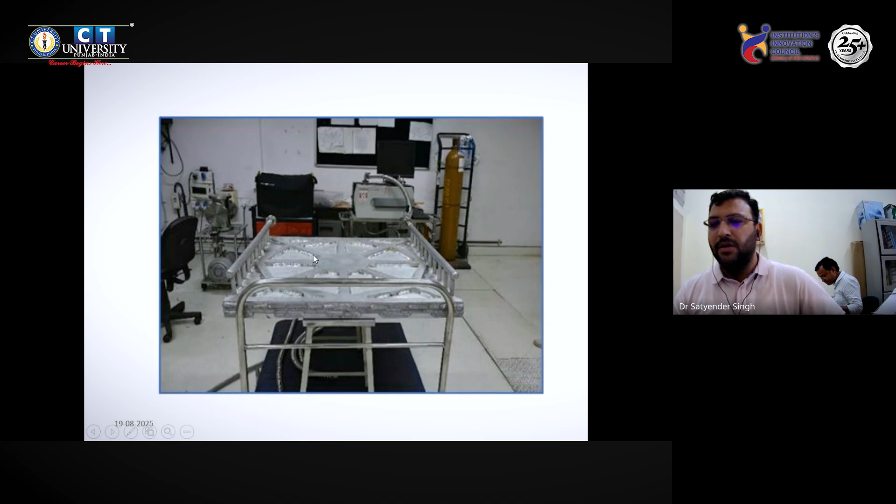So this is the result that comes as an outcome. You can see when we put this whole device under the cooling cycle, at various locations we applied temperature sensors on the top surface of this device so that we can see the gradients everywhere.

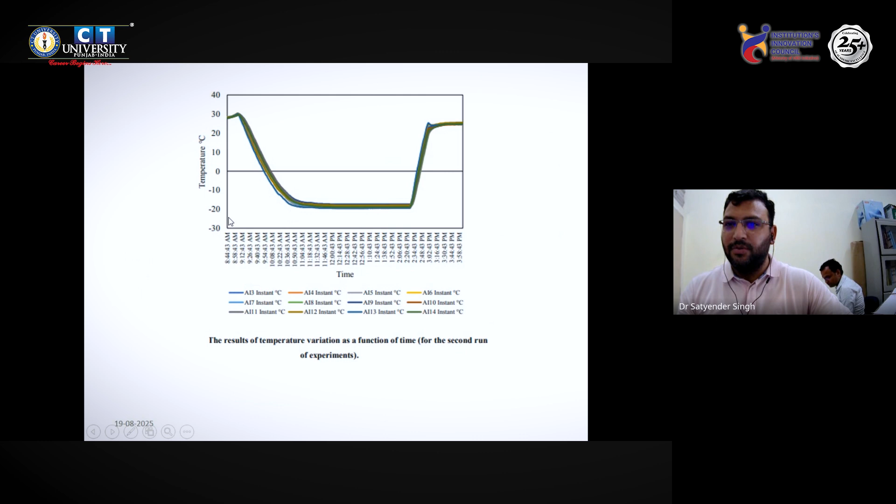Following a very gentle slope, within a few fractions this whole device is able to maintain a very low temperature, keeping it at minus 20, 30, and then instantly rising up again. That saved ISRO huge cost compared to their earlier investment.

And we have implemented this in the existing facility for testing every electrical and electronic equipment that has to be part of space vehicles later on.

So overall, moving toward the conclusion: our journey starts with the initial planning, a thought inspired from society, personal experiences, or driven from national or international interest. Then from planning we move to execution.

Execution starts with a particular design, and then analysis of that design, which can involve experiments or mathematical exercises, as I discussed throughout my lecture. Then it's time to implement, and we test it under real working conditions to check durability, flexibility, and mechanical strength. Once that is fulfilled, it gets launched as a commercial product.

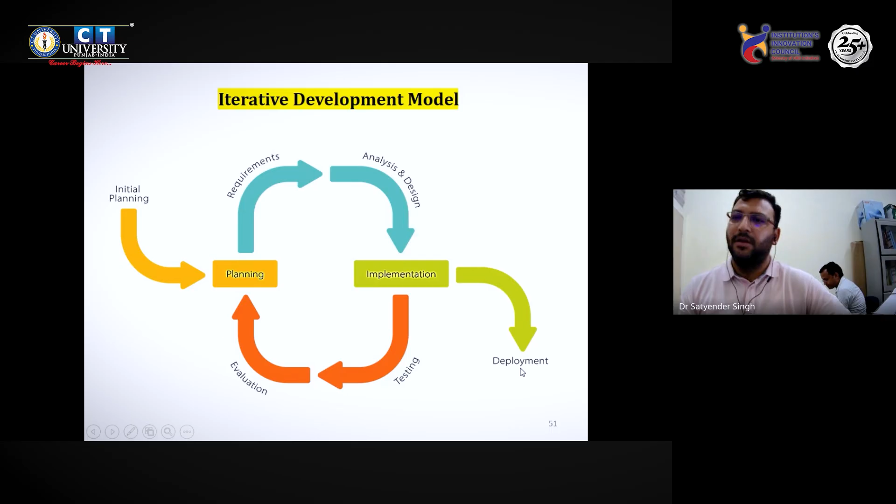During this journey, 3D printing has also helped us many times. For example, we are presently working on a swirl problem, contributing to a heat transfer problem that came from industry. They want to cool down a particular plate at a very high temperature with instant cooling, so we are implementing a swirl air jet kind of design.

Using 3D printing, we manufactured these nozzles that create the swirls, tested them under experimental conditions within the lab under indoor controlled conditions, and delivered the product to them. So what does this follow? These 3D printing processes actually need one CAD drawing.

That CAD drawing, you can conduct some mathematical exercise on that if required. Finite element method is also another domain to do structural analysis particularly, and we have CFD tools that I already discussed to do heat transfer and fluid dynamics related exercises.

So once your drawing is well analyzed through these tools, and you want to implement that, first prototyping can be done through 3D printing. Students are well aware of 3D printing now, where layer by layer it keeps on depositing various polymers. Metal 3D printers are also available nowadays, so even a metallic structure, except machining, can be directly created using molten metals. Similarly, structures can be created into their 3D layouts and then tested experimentally for their feasibility.

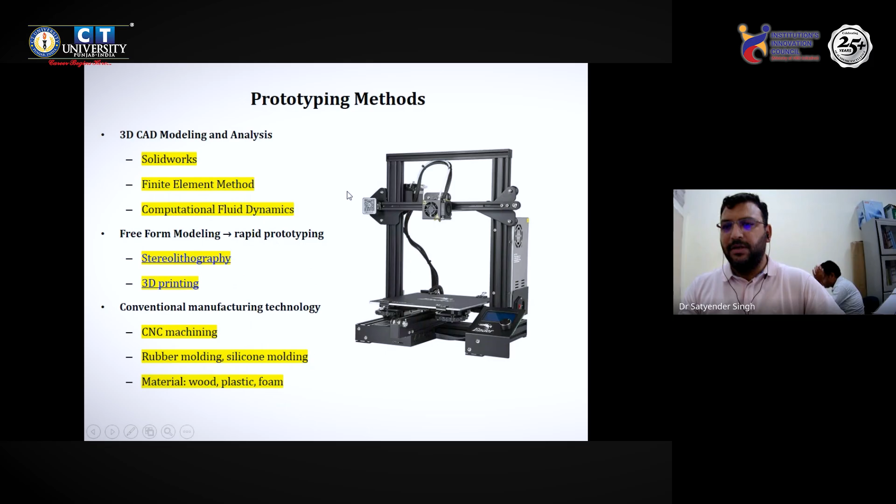Some example of that - this is the nozzle I'm talking about. We designed these nozzles to create swirls, and then using the help of a 3D printer, we created the same structure which we designed in a CAD software. We manufactured it using 3D printing, and then tested it later on.

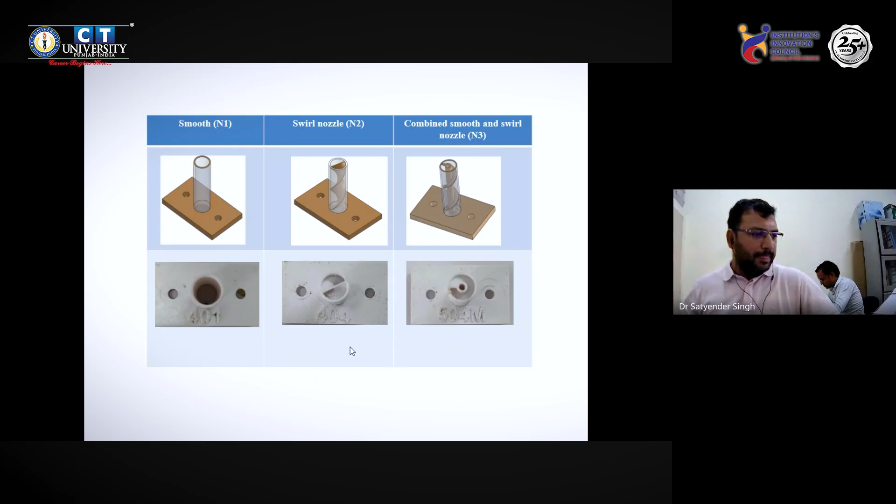If I'm not wrong, the question is how to use 3D printing. Is it the question how to use 3D printing actually?

Okay, so actually this requires mathematical coordinates earlier. Every mechanical process, either machining or directly layer by layer creation of a 3D product, needs coordinates. So whether you have to do any CFD analysis or any mathematical tool for your simulation, it needs a space - mathematical space, coordinates are required. So we need to first create that.

That can be done with the help of codes by specifying your coordinates, or with the help of some CAD drawings. There are many CAD software - SolidWorks, AutoCAD, ProE, similar to that. So there you have to first create the drawing of your 3D problem, and that as a command is given directly to this particular 3D printing machine, and taking the information of the coordinates, it keeps on depositing the layers of the fused material.

Sometimes we have various polymers we are using in 3D printing machines. There are some heaters inside that melt the material and keep on depositing that. This is the way 3D printing actually works.